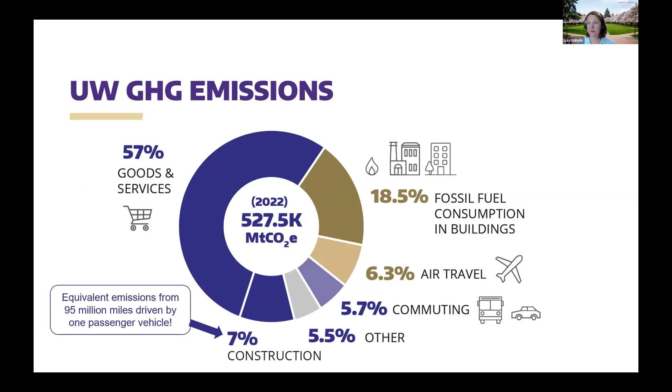Okay. So the Green Building Standard, just going to touch quickly on applicability and rollout. So this new standard that was put into place about a year ago applies to all of our capital projects, so not just building projects in Washington State. It includes all properties and spaces that are owned and operated by UW, all campuses and satellite locations. It applies to all of our divisions, departments, and units, so both academic colleges, UW Medicine and Healthcare, et cetera, athletics, and it's for projects that are over $1 million.

So phase 1 of this new standard took effect July 1st of last year. We did have a couple projects that were already formed prior to that date. And so they've been sort of on that transition of doing what they can with the budget established. But everything moving forward that was formed after that date is under the full new Green Building Standard, or GBS.

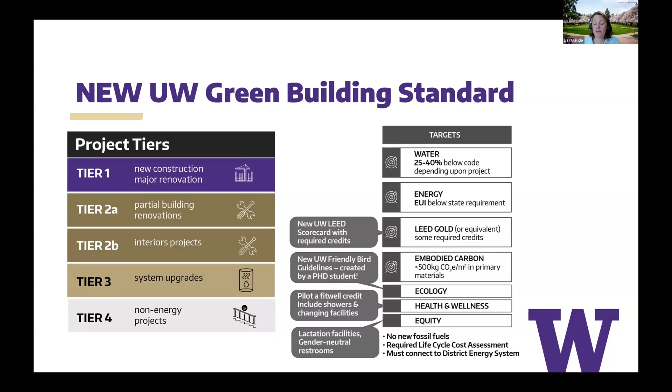And then at the bottom, those 3 bullets are also really important. So we have said no new fossil fuels in any of our projects at UW. That excludes backup or emergency power, generators, et cetera. As I mentioned, we require that life cycle cost assessment or analysis for all of our projects, and they have to connect to the district energy system. And that is because UW has a long-term plan in place to transition off of fossil fuels and fully electrify our central plant.

Okay, so as far as embodied carbon, we actually developed this about a year ago for our facilities and UW leadership, to help answer some questions that they had about embodied carbon. So I thought this might be useful if you work for an organization that's considering an embodied carbon requirement. This helped educate our leadership about what we were going to require before this was officially adopted. So all projects have to meet product requirements for embodied carbon.

And essentially we're saying you have to look at the CLF's materials baseline report and meet those as the product-specific specifications. Tier 1 and Tier 2 projects also have a design target that you saw on the previous slide. And then we also want to see the construction actuals. And for the most part, we are referring folks to the EC3 tool. For our larger projects, we have the consultants on board that actually have some of their own tools to model embodied carbon, and that's fine.

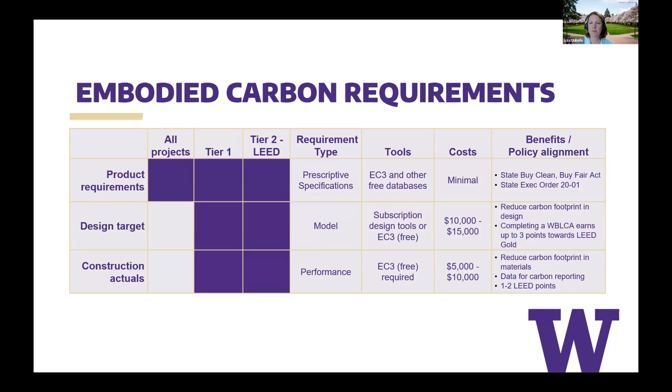And then we also wanted to give leadership a general idea of what the additional costs would be. And a lot of these are more of those soft costs for the consultants that we bring on board. This actually ended up being really fortuitous that we put this in place because the state's Buy Clean, Buy Fair Act is also now official, and so we were ahead of the game in that sense, that we've already set up this requirement and a reporting mechanism internally to capture that data.

As far as the life cycle cost analysis, this isn't to say UW isn't already doing life cycle cost analyses on our projects. We are, and I think we're really doing a great job on it. But this helps reinforce life cycle cost analysis on smaller projects, things that might be in that tier 3 category. If we're replacing a boiler, for example, or a portion of a mechanical system in a building, this will help ensure that projects not only on our tri-campus, but also some of the healthcare projects across the state comply with those EUI targets, and help us move the EUI needle down to where it needs to be to meet some of those state requirements.

Okay. For EUI targets, as I'm sure all of you know, they're required by the state Clean Building Performance Standard and City of Seattle BEPS. Again, this across-the-board organizational green building standard really helps ensure that all of our different properties are complying. And whether it's an incremental change in a system or a portion of a system, or whether we're building an entire new building, this is a mechanism to help ensure compliance and progress in that regard.

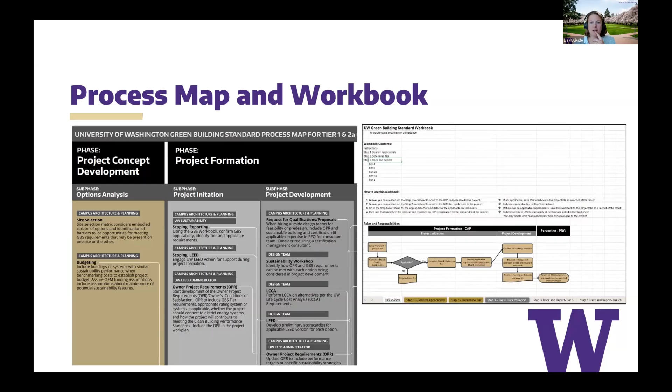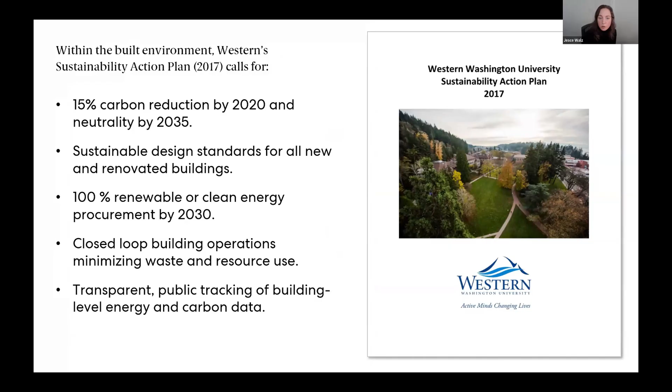And then sustainable design standards for all new buildings with also focus on renovation. 100% renewable or clean energy procurement by 2030. Closed loop building operations to minimize waste and resource use, and then transparency and data sharing. These are their targets, and those were established when we started the project in 2019.

One of the big challenges that came up for our project is that Western's campus is currently on a steam grid, and that's a fossil-based steam grid. And they have a larger goal of electrifying their steam grid and transitioning the whole campus to electricity. The project we're going to share was the first electric transition on campus. It is connected to Puget Sound Energy because the campus transition is still occurring. But a 2022 feasibility study identified a plan for this district heating and cooling.

It's happening through nodal systems that use air and ground source heat pumps and low temperature hot water distribution. So those nodes will be placed throughout campus and they will operate depending on specific needs. The residential part of campus is heating only. The buildings with more of an internal heating load that need cooling will have both heating and cooling. So this will be a huge impact in reducing carbon, it improves efficiency and it sets the stage for full electrification to meet the campus's goals. This project is in schematic design and funding phases are moving it forward.

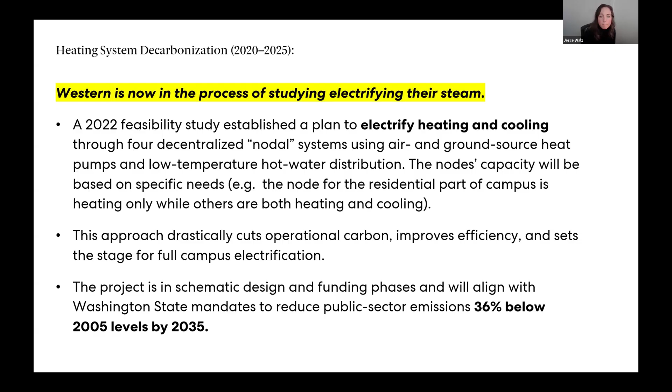And then simultaneously, there is a capital development and strategic action plan that goes alongside the sustainability action plan. This reinforces Western's carbon and sustainability goals, and it's a guiding principle for future projects. So again, this is reiterating the prioritization of reuse and renovation and infill to limit embodied carbon, and we know that's the first and most important step. And then also encouraging flexible, upgradable systems so that they can adapt to new technologies. The electrification is just one example of that.

And then new buildings that are going in will also be able to operate on that electrified campus system. And then coordination between campus utilities and buildings to support electrification. Working with utilities and operations to get the Kaiser Borsari project off did take some communication. It's a different way that they've been operating. And so this is a really integrated and holistic approach that Western is taking to realize their values.

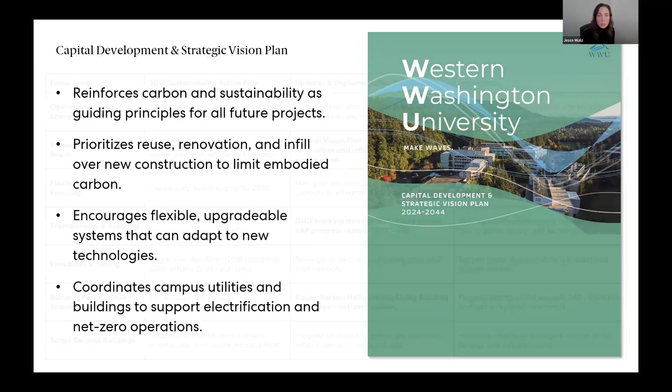This table is probably one to take a screenshot of, but I've just compared their 2017 plan to updates and implementation that have occurred since that plan was established and what the major considerations are of those. And so a highlight that I just shared is that capital vision plan favoring reuse and renovation. And then they're also doing GHG tracking through online platforms and increasing transparency, reporting on how things are going. There have been some goals that are delayed by funding gaps and staff capacity, but they continue to move forward.

And I think that with decarbonization, it is easy to get discouraged in the face of what we have to do, but rigorous incremental commitment is really the way to go, and Western has been a great example of that. Kaiser Borsari Hall is a flagship project that is pursuing not Living Building Challenge, but actually net zero energy and net zero carbon, and those certifications are set to go through in January after we've had a year of consistent operation.

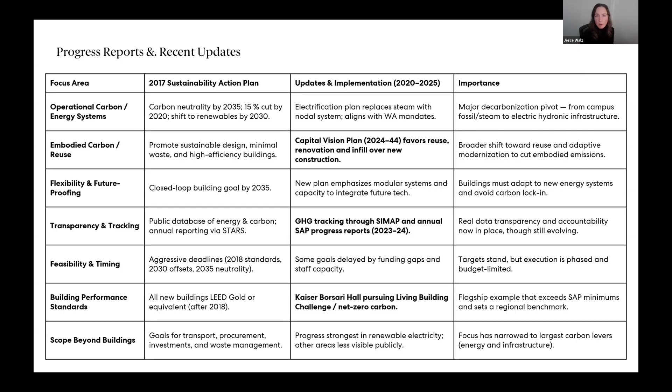So I'll share a little bit more about the project. This project is an electrical engineering and computer sciences building, and it's shown on the right. It connects to Western's existing communications facility, which is shown on the left, and together these form an advanced technology engineering facility. As I mentioned, this is a flagship project. It's meant to embody Western's future trajectory and a cornerstone to advance their educational mission. This is really a big step towards realizing the 2017 SAP and help the rest of the campus transition.

And this is the project team who have been awesome. I'm going to share a number of analyses, and I just upfront want to give them credit, especially CPL, AEI, Mortenson have really come together with our team to perform carbon analysis. I'll share those with this group because I know that you'll be interested in them.

And then some background, Western did come to the table with this project with a net zero energy goal. There's a donor who wanted to realize that. And at the very first meeting that we held in our office, we talked about the campus steam and electrification and what would net zero energy really mean for their project. And then we also talked about mass timber and embodied carbon, as well as living future standards. And that conversation really took hold to set the stage for our team's collaboration throughout the whole project cycle.

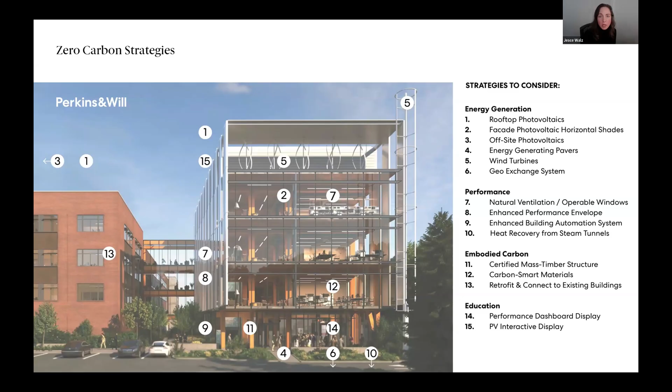So for the rest of the presentation, I'm going to share some of my favorite slides. We have so much analysis on this project that I can't include it all or go through it all in the time that we have, but I'm just going to share with you some of our favorite analyses and then also project photos. This is an early analysis that we did with the team, just understanding where could we start working towards net zero energy as well as embodied carbon reduction alongside one another.

CPL came in and they used Athena to do an early comparison of mass timber, concrete, and steel structure. And then we also looked at that in the EC3 tool, just recognizing that product-specific variability could influence what is really the lowest impact option. And so you see the variability in the kind of dashed or hashed areas in the bars that are to the right.

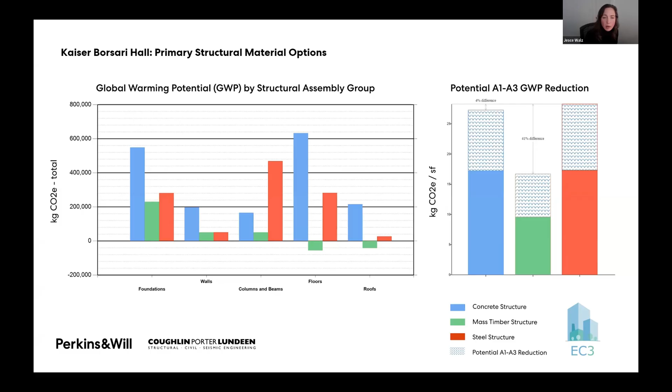CPL also did analysis of different structural deck options and identified the lowest impact option for the structural deck. We ended up using gypcrete topping instead of concrete topping. And that was a conversation to be had about durability and could we make that work with maintenance.

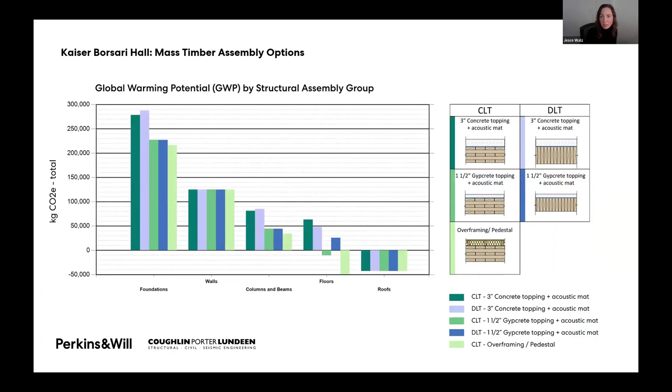And then site-wise, stepping back a bit from embodied carbon and into operational, campus here is beautiful. The site is really interesting. You can see over on the left of this slide an early rendering of what we had thought the project might look like. It's a bit more glassy than what we landed on. You can also see Sehome Arboretum extending up to the right of the building there. And that is shading the project from early morning sun, which is going to impact the solar array. It also provides an amazing opportunity for connection to ecology.

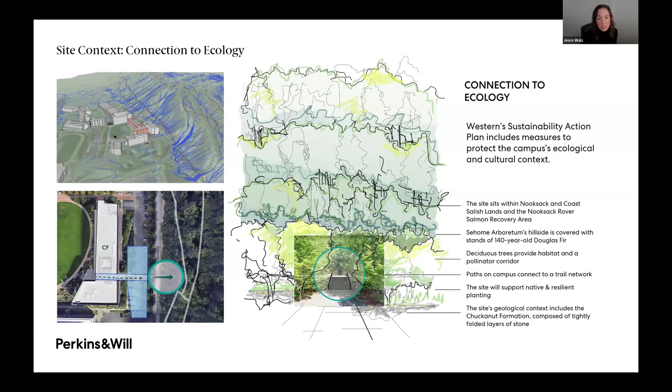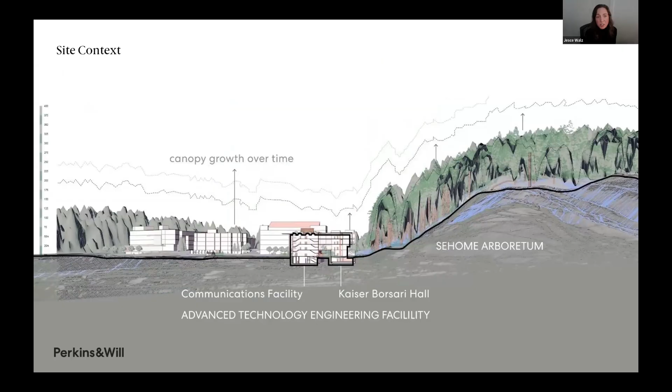We identified right away that there is a pathway that is adjacent to the site going into the Arboretum. So we've said that our invisible staircase for this project is on the inside of the building, leading to the outside of the Arboretum. And this is a site section. We worked with a GIS analyst and our internal research to do studies where we got LiDAR data, estimated how much the tree canopy would grow over time and whether that would impact the solar shading.

And here you can see project photos of this notch that is happening in the building that's opposite the staircase in the Arboretum, drawing attention to that. So if you're standing in the building and look out through that, you can see cyclists going by and people going up and down the stairs, which is a really nice biophilic moment.

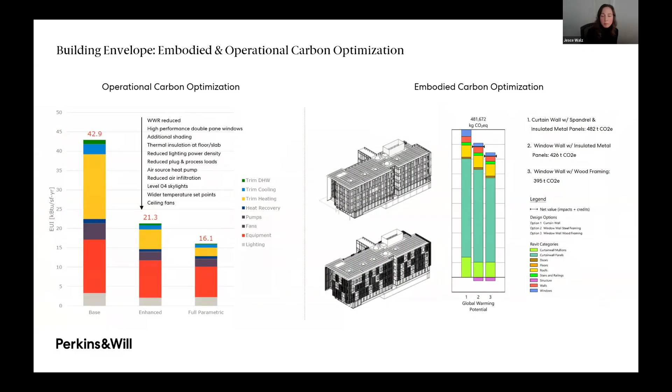And then we worked with AEI to assess operational and embodied carbon together. The team was able to reduce the project's EUI target through improved envelope tightness and reduced window to wall ratio. And that synergized well with the embodied carbon goals. We reduced the curtain wall and we moved to a punched opening and then to a wood facade and analyzed design options of both of those, as well as daylight and views and how that would all interact.

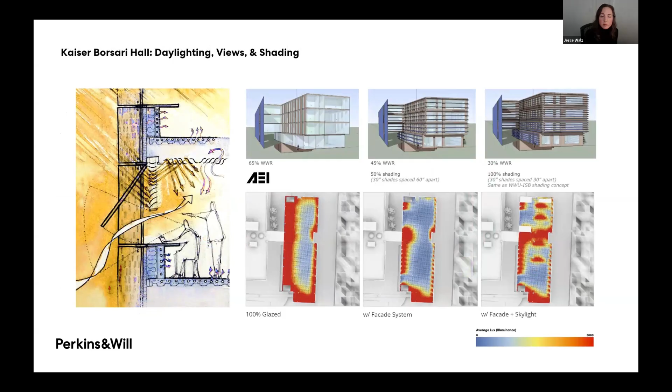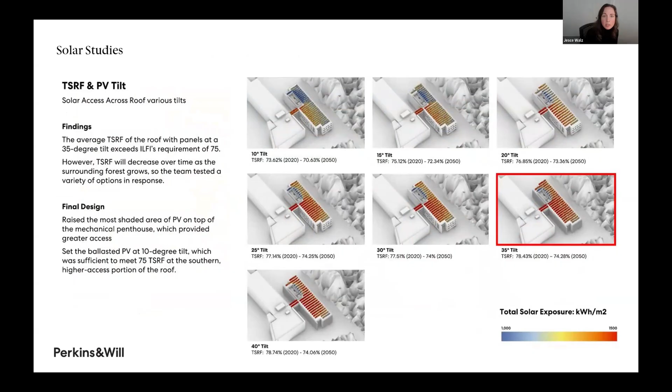And here you can see some of the envelope design. We ended up going with an Akoya wood cladding and windows, and then there's some solar shading that is on the north of the building alongside a lounge where it's a bit more glassy.

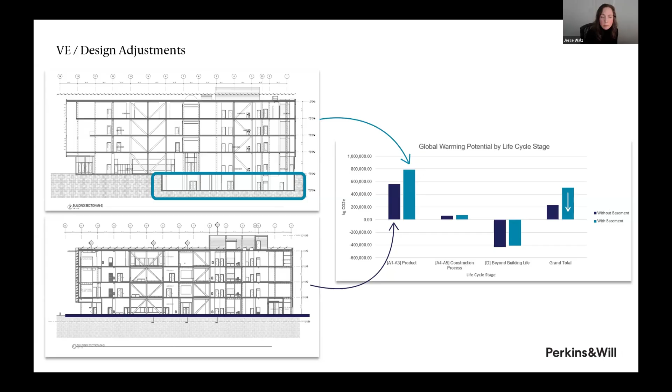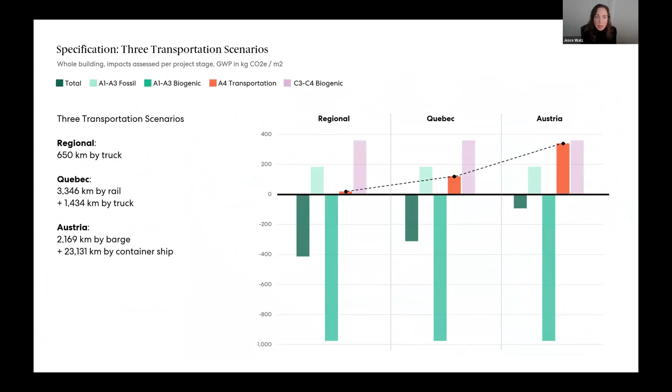So we ended up sourcing from closer to the site in BC from Kolesnikoff, and we're able to visit their plant. That also boded well with the project's ecological story, understanding where our wood came from, and Kolesnikoff being a vertical supplier, we knew about their forest management process.

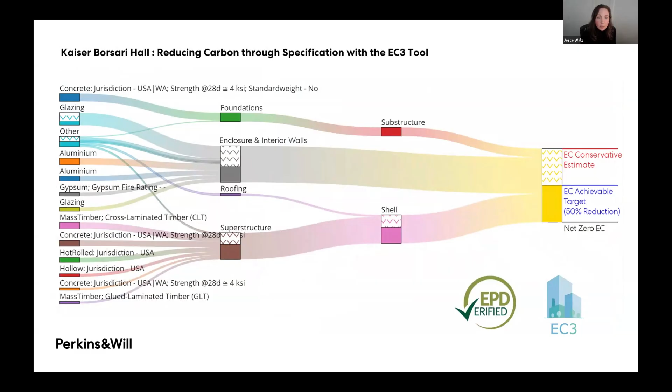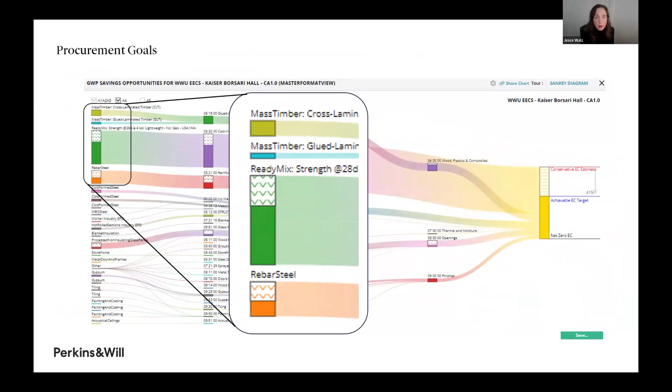And then we looked with CPL at the EC3 tool, identifying procurement goals. And so those included looking at the ready mix and the rebar and several other materials to get EPDs. And I'll show you in a moment the result of that. We did specify products with EPDs as much as possible.

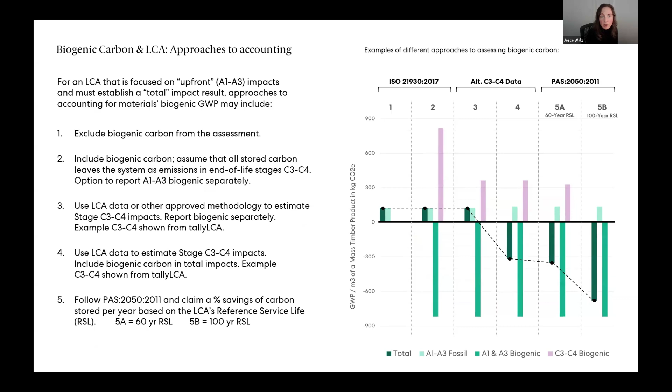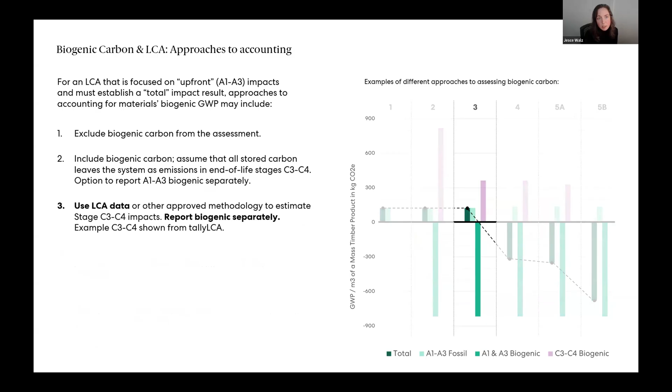We also looked at different approaches to biogenic carbon accounting, so just to say that there are many different approaches that a project could take. Stepping back here, we ended up focusing on this third approach, which is that we used LCA data for our stage 3, C3, and C4 impacts based on what would most realistically happen with the wood, but we accounted for our biogenic carbon separately. So we show both biogenic and fossil, and we include both the C3 and C4 as well as the A1 to A3 biogenic impacts when we count that biogenic.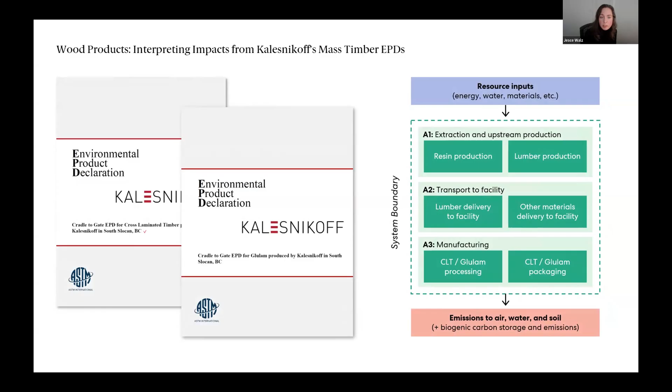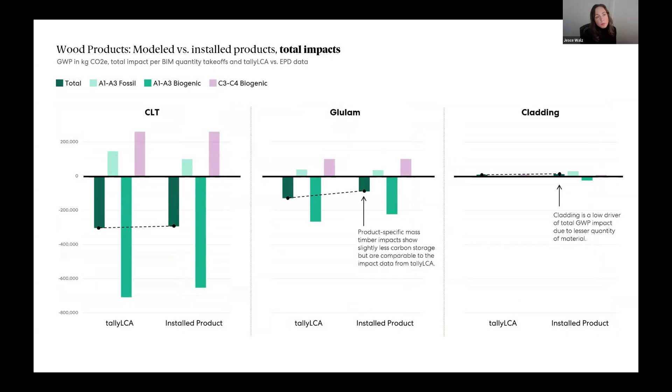Kalesnikoff also had EPDs, which is great to be able to review their process and understand more about their EPD development. And when we worked with the Tally data, because we did our analyses in Tally and their EPDs, we found that the impacts were pretty similar. You can see in each of these charts, Tally LCA's assumptions on the left, the installed product on the right for each CLT, glulam, and cladding.

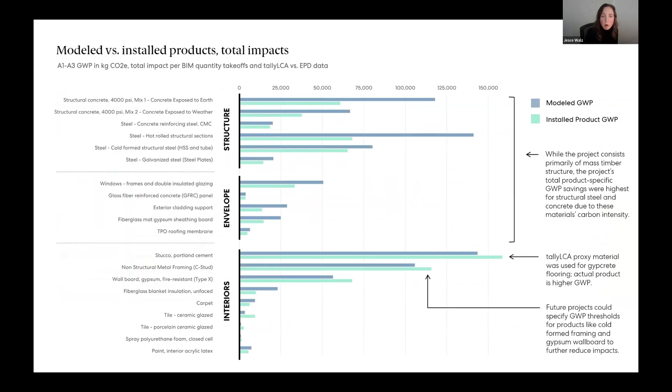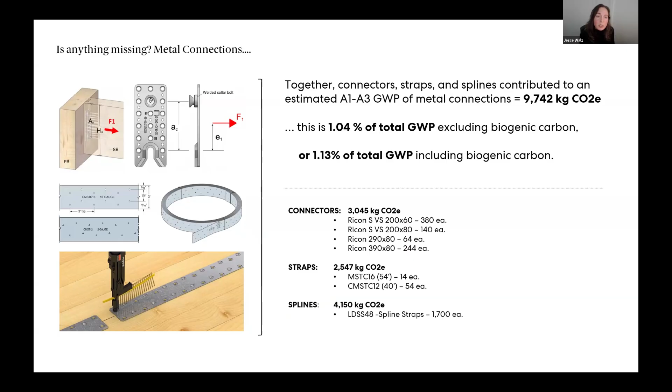We looked at the metal straps and connectors in the project and their impact and found that they were pretty low. This is partially just because the project also did have some BRBs. We haven't broken those impacts out yet. I'd be curious to see that, but within the whole scope of the project, the metal connections that are typical of a mass timber project were not a massive driver. And they also allow for many of the elements to be disassembled in the future.

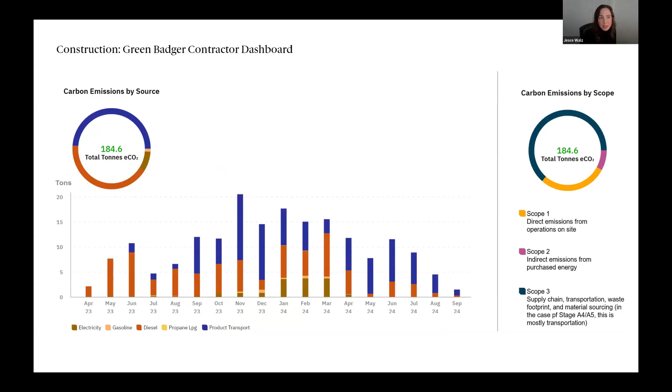We tracked the A5 impacts with Mortenson in a dashboard. We did Green Badger here. That could be a presentation in and of itself.

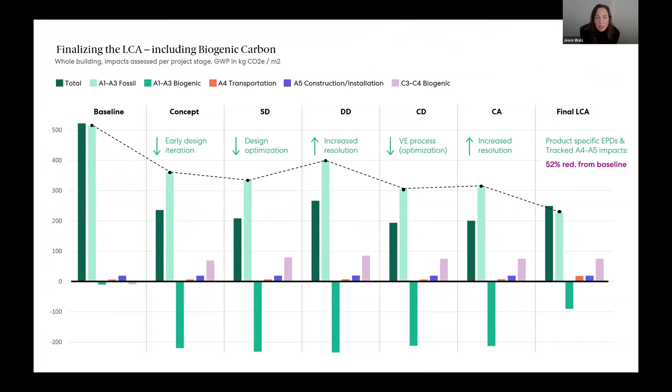This has been really fun to work on. It's great to see it completed, and we're looking forward to wrapping up the certifications over the coming months.